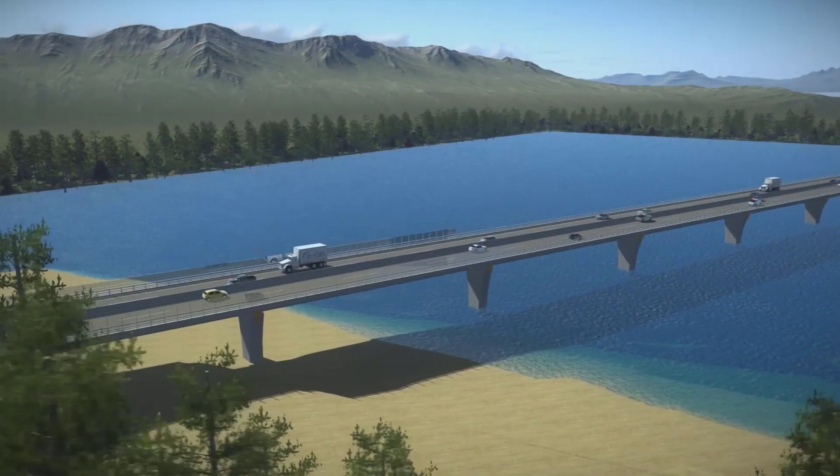The students were able to model their own 3D bridge using Bentley's Open Bridge software. The following design parameters were followed.

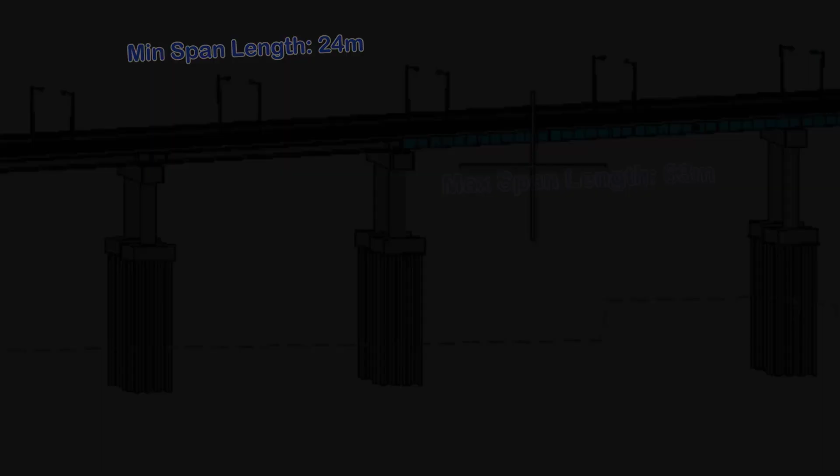Bridge length of 360.9 meters. Finished grade elevation of 176.922 meters. Minimum span length 24 meters, maximum span length 63 meters, minimum bridge width 23 meters. Two-way road, 2 walkways, 2 traffic barriers, 2 parapets, and 1 median barrier.

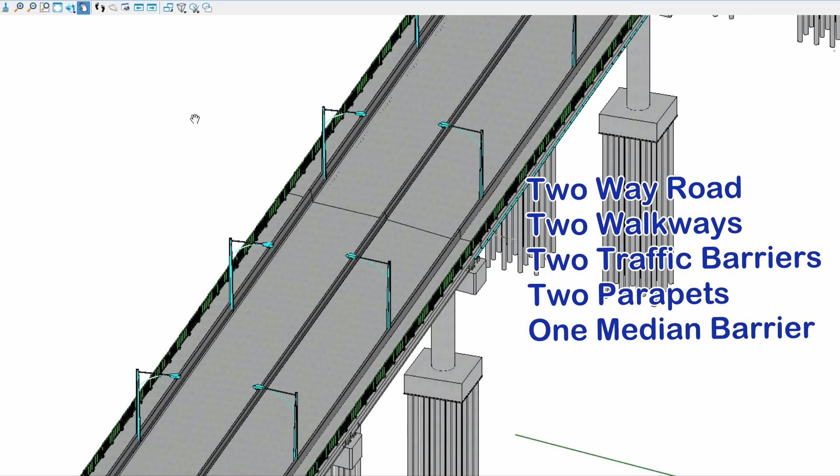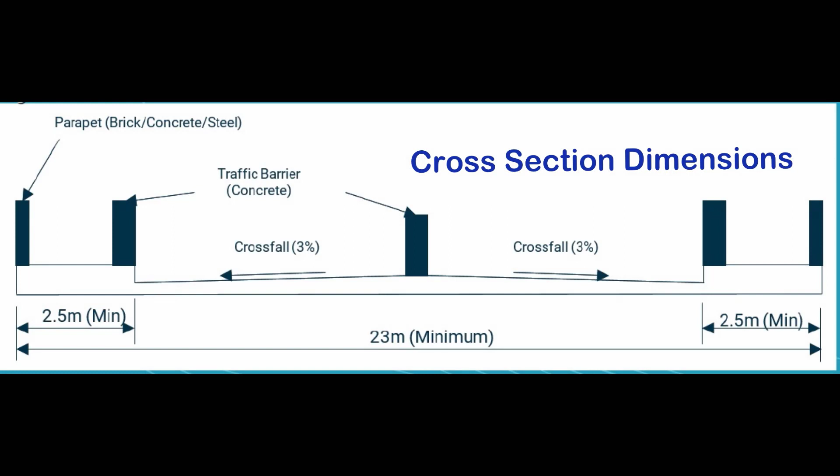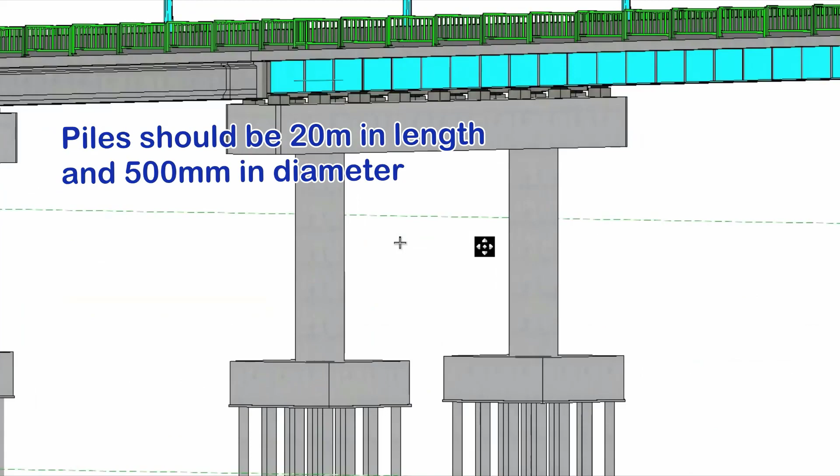Cross-section dimensions: adjacent spans will have steel girders, while all other spans will have concrete girders. Steel girders shall be built-up I-shaped members with cross braces and stiffener plates. Edge beams should have splice connections. Piers and abutments can be of any shape. Piles should be 20 meters in length and 500 millimeters in diameter. Wing walls for both abutments are required.

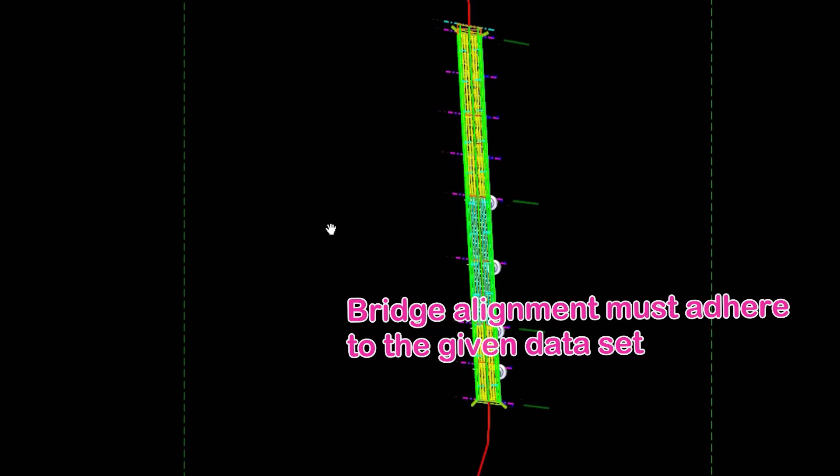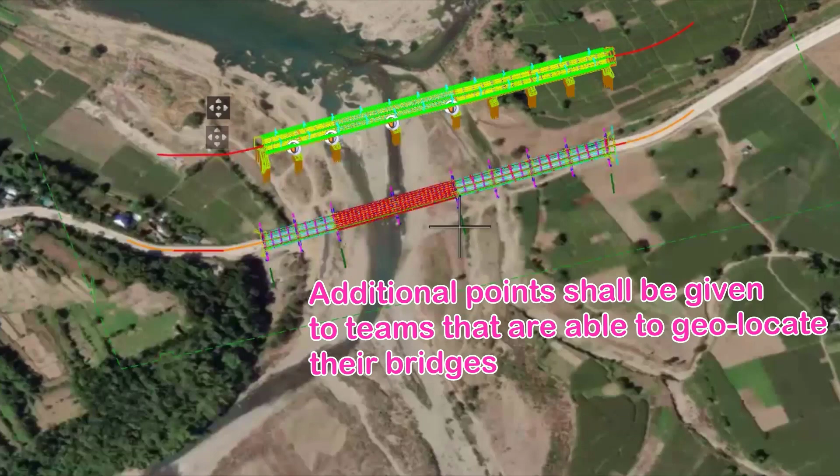Bridge alignment must adhere to the given dataset. Additional points shall be given to teams that are able to geolocate their bridges.

Here is the competition timeline for the 2022 Skills Olympics. The competition officially started last June 9 during PhilConstruct Clark. The design phase began on June 14, while the methodology phase will officially start on July 22 during PhilConstruct Cebu. The construction or build phase will commence on September 10 during PhilConstruct Davao. The grand finals and awarding of the winning team shall be announced during PhilConstruct Manila at the SMX Center.

Who will win the grand prize of 100,000 pesos? Let's meet our participating teams.

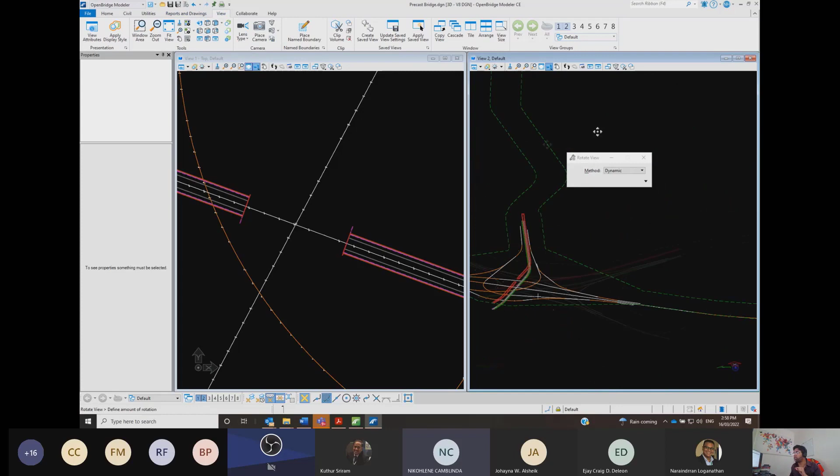To prepare the students for this phase, a series of software trainings were officially facilitated by Bentley. For the first session, Bentley focused on the introduction of OpenBridge, with our instructor, Engineer Nazir, detailing the scope and limitations of the software. He also tackled the most important aspect of modeling a bridge, which was the alignment. Engineer Nazir also tackled topics on how to import geometry files, which would prove vital for the positioning of the substructure elements of the bridge.

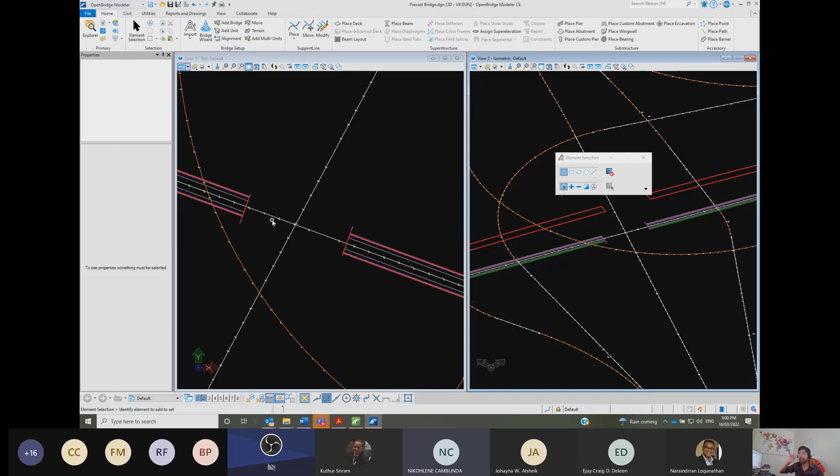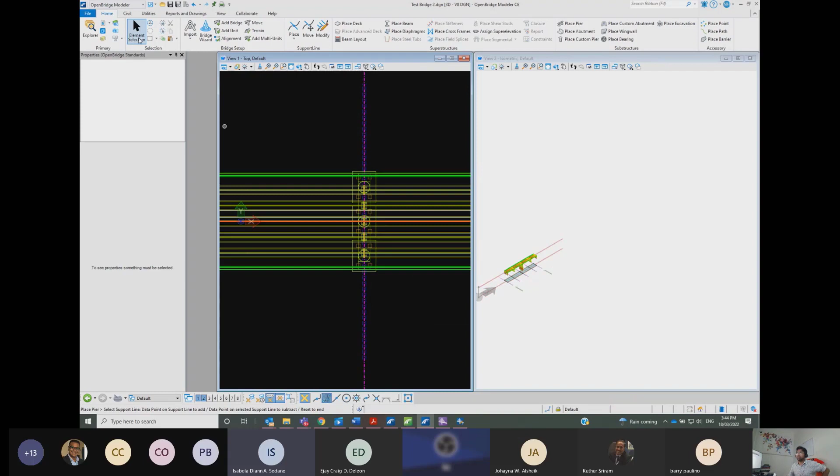For the second session, the creation of the super and substructure elements were discussed. The placement of the bridge deck, beam layouts, and girders were tackled during the first half of the session. For the latter half, the placement of the piers, pile caps, and abutments were touched upon. Within 2 sessions, Engineer Nazir was already able to teach the participants how to roughly model a basic bridge.

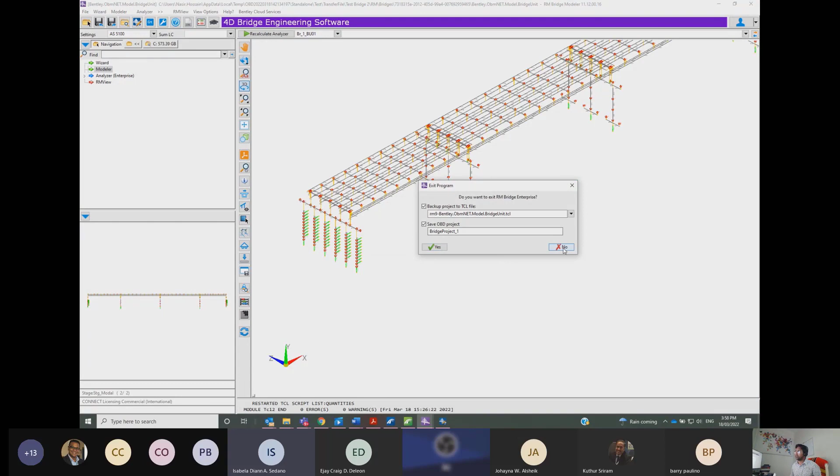Succeeding sessions served to further enhance the mastery of both the mentors and the students, with Nazir giving us some helpful tips and tricks. Specifically, he gave pointers on how to create custom deck and beam profiles. He also demonstrated how the participants can use OpenBridge's geolocation tools to help them identify the exact location of the bridge that they are building.

These sessions proved to be the most fruitful ones, as our participants were directly interacting with Nazir and all of their previous struggles and questions were clarified. This was indeed a eureka moment for the entire design phase.

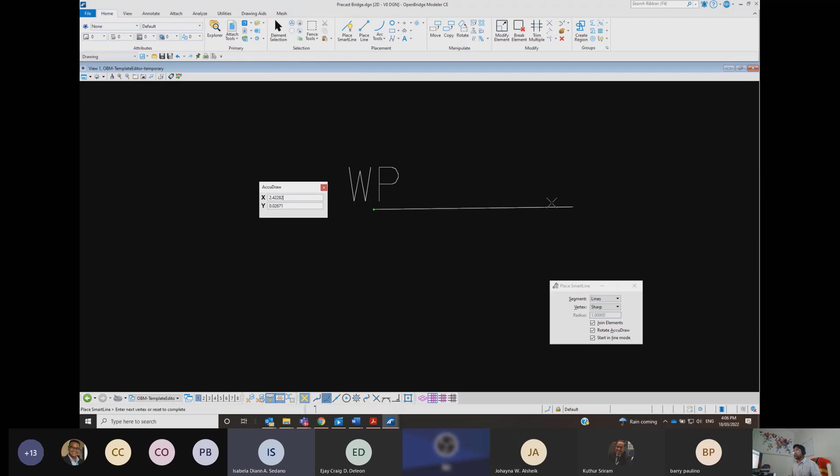We would like to share some audio snippets from our lead instructor, Engineer Nazir Hussain of Bentley Education Systems. Here, he discusses the type of environment that he wants the students to experience during the design phase.

We can think of it, it's a very good question. I would think of it this way: professionally, commercially, when the owner organization asks for some tender for design, we actually don't do the full design by that time, because you are just submitting the tender documentation. So sometimes it's very preliminary sketches, 1, 2, 3, 4 pages maximum. But from there you need to propagate certain things. Anyway, it's not a real life commercial thing here, but we are just trying to give a flavor of how commercial things happen in a real life scenario.

That's why we are very transparent on the points part, on how the points will be allocated. Like the alignment profile, you have 20 points. If the alignment and profile is perfectly done with the geographic coordinate system also, then you get the 10 points. If not, then you don't get it. If you can show those things, the deck, we have the variables. If you go into the deck, there are the variables. What are the minimum variables we wanted? If the variables are properly defined, then for the deck you get 15 points. So all those points based on the concrete spans, beams and other diaphragms, that's 5 points.

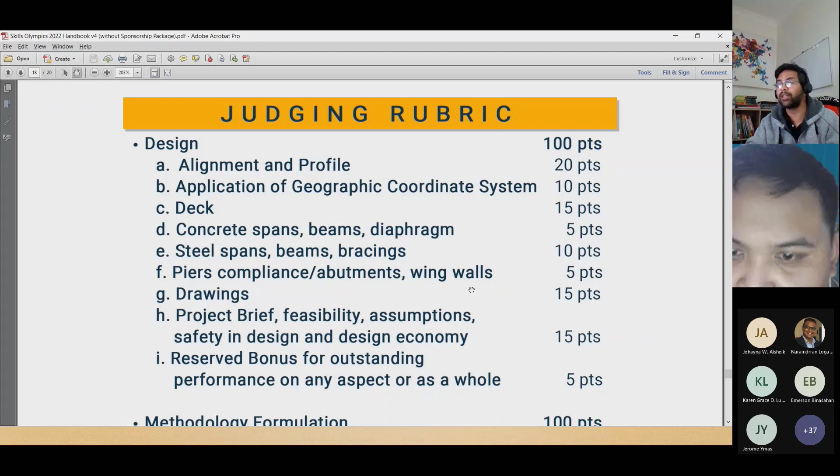Based on all these things you get 95 points, and 5 is reserved if there is some outstanding performance by someone on presentation or feasibility - something we don't know. We're reserving that so we can distribute it at that time. If there's nothing exceptionally outstanding, we'll keep that 5 away. That's out of 95. Just think from this perspective that you are doing something for tender submission, a commercial perspective. That exactly happens to owner or agent as well, because I work for owner organizations, and we used to do exactly the same way - we have a cut-off date and that's it.

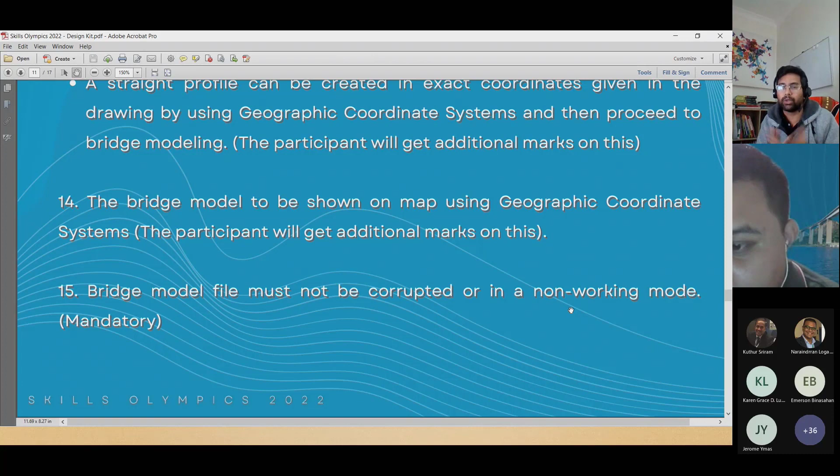So if you find there are questions, we are saying we are closed, right? It means you can't ask questions - you need to make your own assumptions and then go ahead with the model and bridge, because this isn't just about the software, it's your understanding, how you develop your studies. We want to see the whole holistic approach of how you do project management from a design perspective.

But sometimes we think from owner organizations, you need to be very fair to everyone. You need some criteria where you can judge people, and not only judge - we also want to give you a fun environment where you learn and get your portfolio, and it's a valuable portfolio. I can guarantee you, once you put your head through this, once it's done, you will feel you have learned something very significant. I can guarantee that to all our students.

Let's discuss the criteria and pointing system for the design phase. The total points to be awarded for the design phase is 100 points, with the following bridge elements garnering points based on their importance and impact to the finished project.

Alignment and profile, 20 points. Application of geographic coordinate system, 10 points. Bridge deck, 15 points. Concrete spans, beams, and diaphragm, 5 points. Steel spans, beams, and bracings, 10 points. Piers, abutments, and wing walls, 5 points. Drawings or drawing sets, 15 points. Project brief, feasibility, assumptions, safety in design, and design economy, 15 points. Reserved bonus for outstanding performance, 5 points.

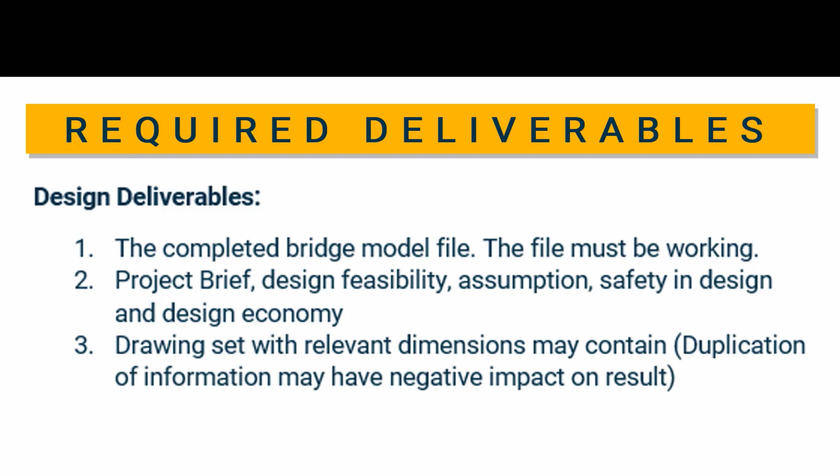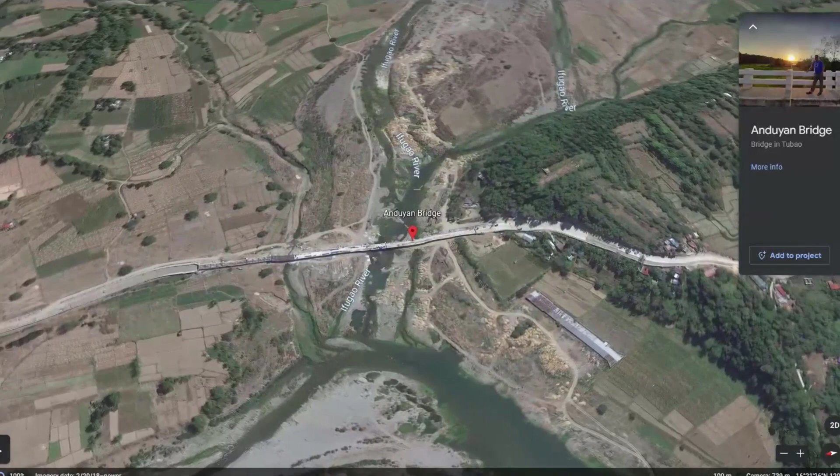With an enormous amount of help from the Department of Public Works and Highways, DPWH, we were able to obtain all the relevant bridge data that will be used for the competition. The actual structure is the Anduyan Bridge, based in Tubao, La Union.

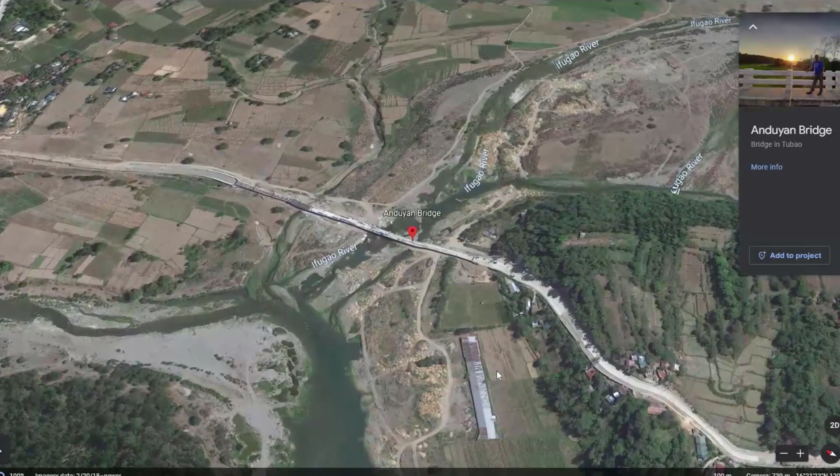Now, let us dive into the design process of our participants.

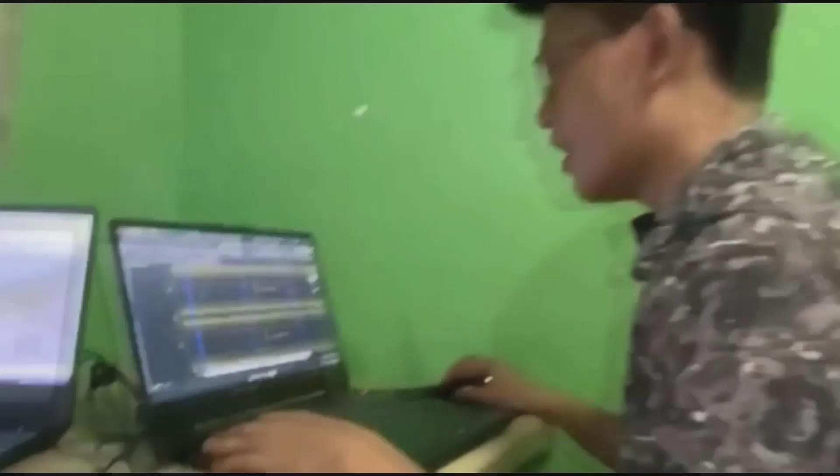Well, for starters, you need to identify the site constraints and key issues. Say, for example, for a river crossing bridge, ask yourself: where is the nearest fault system to the project site? Is there an issue in terms of soil liquefaction? Is there a history of excessive flood in the vicinity? How about the river morphology? Is foundation scouring expected? In short, you need to facilitate background data review based on the available information.

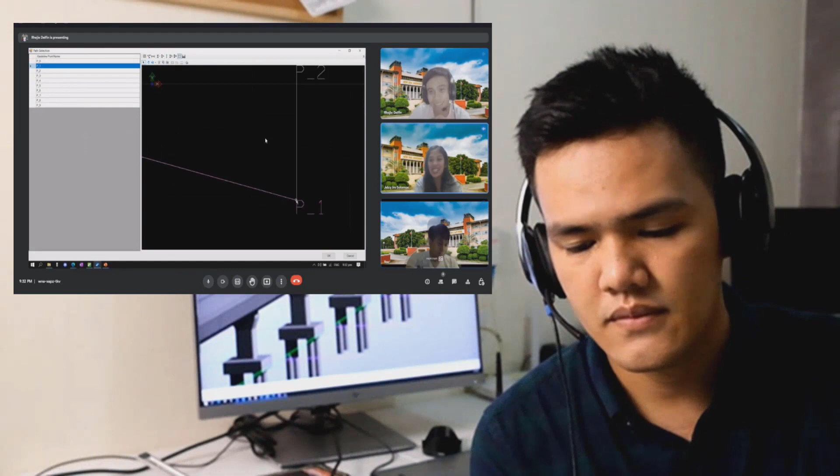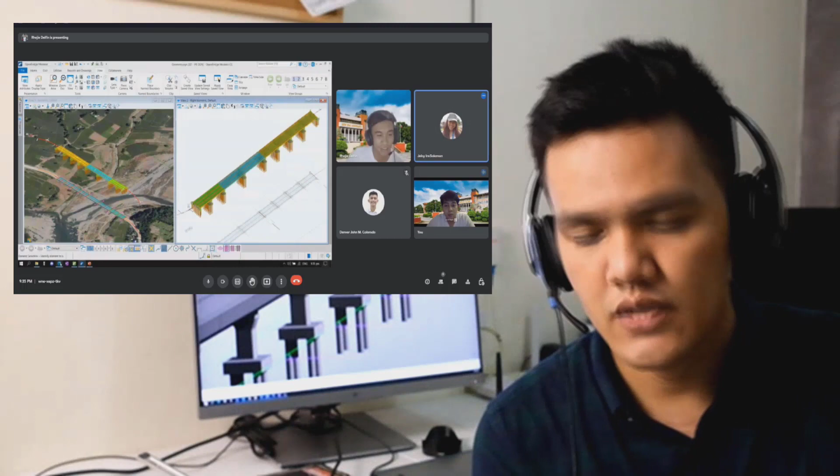The next step is you need to develop and compare various design options and provide relevant assessment methodology for the selection of each option. For example, in the case of span arrangement, where should I position my piers in order to achieve economy and efficiency during construction? Optioneering is also a vital part of the concept design.

Now, let's take a look at some of the bridge models that our participants submitted.

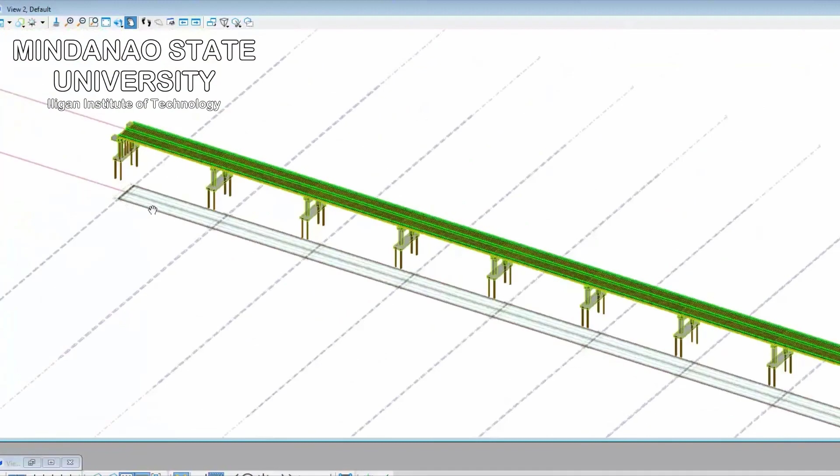Let's meet the design phase judges. Engineer Nazir Hossein, a senior application engineer from Bentley Systems. He has 15 years experience in structural engineering design and management in various disciplines, including bridge, road and rail infrastructure, onshore oil, gas and petrochemical, building, port and mining industries in the US, Asia, and Australia. His core experiences include but are not limited to bridge design and analysis, load rating, structural steel and reinforced concrete structural design and analysis, finite element analysis, and project management.

Dr. Ernesto De Castro is the President and Chief Executive Officer of ESCA International, which provides global engineering support services to international architectural, engineering, and construction companies. He is also a member of the Philippine Constructors Association. Throughout his career, he has been involved in and led various organizations and agencies such as the American Society of Civil Engineers, the Philippine Institute of Construction Arbitrators, Association of Consulting Civil Engineers of the Philippines, Association of Structural Engineers of the Philippines, and the Philippine Institute of Civil Engineers, as well as the Philippine Professional Regulation Commission's Board of Civil Engineering.

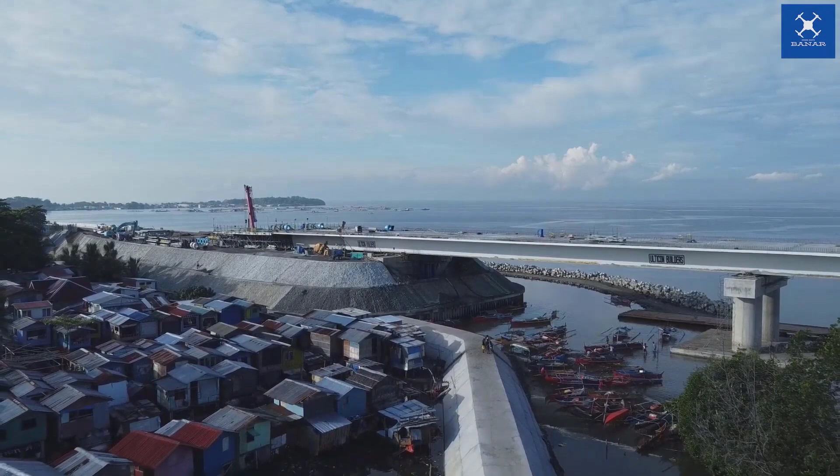Now, let's look at the next software that we will be using for the methodology phase, which will be Bentley's Synchro. Let's take a look.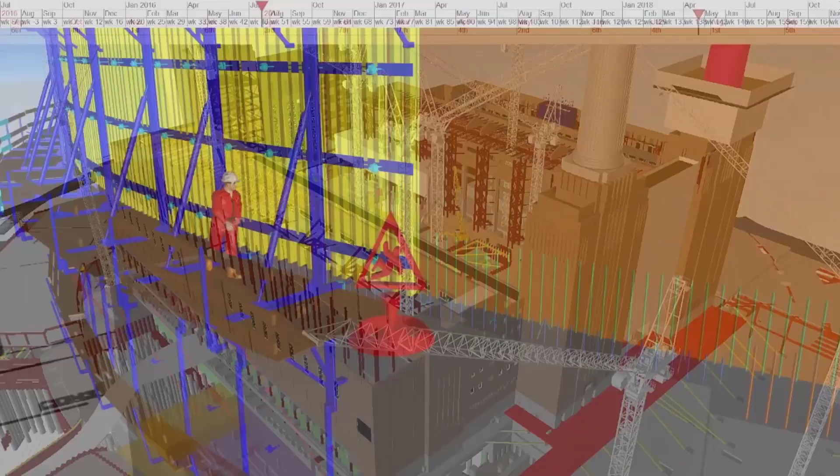The ability to plan, manage, and track projects in an integrated space-time visual environment provides benefits to all types of construction projects. Synchro's digital and interoperable platform enables improvements across all aspects of the delivery process, from safety, workspace utilization, productivity, quality and reliability, to project cost and competitiveness.

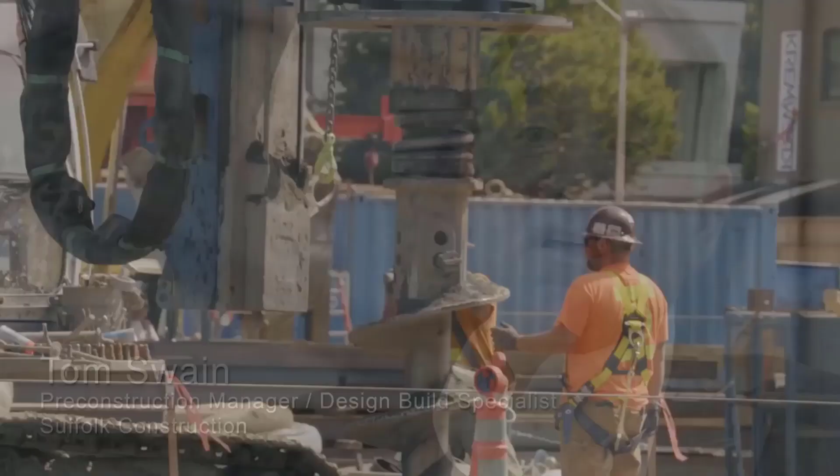Construction projects tend to be projects with a lot of moving parts: labor, material, scheduling constraints. If you don't plan all of those issues out ahead of time, then you're doomed for failure out in the field. Synchro gives the guys who are going to do the work a solid understanding of what the schedule means.

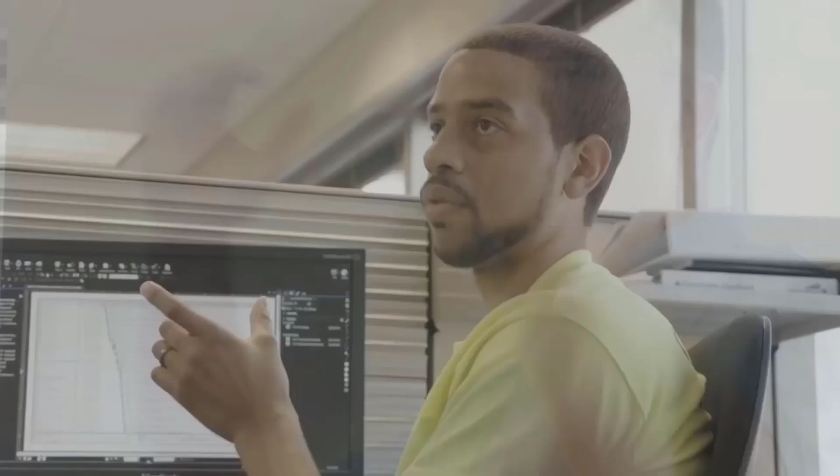We bring in the experts in the field, they tell us their challenges, we make changes, show them options, and then they confirm, yes, this is what we plan to do.

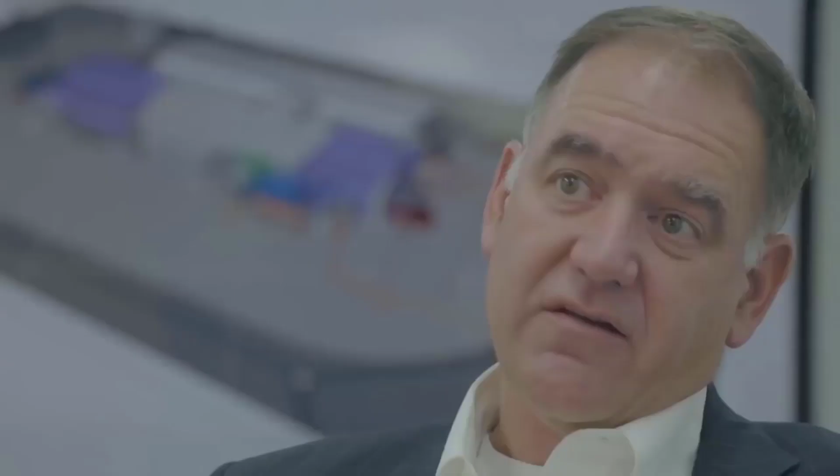We're able to catch things sooner that we wouldn't have caught, and we're also able to explain to the client who sometimes has trouble visualizing in 2D but can clearly see what's happening in 3D, why certain issues are safety concerns, why there are certain logistics, and why certain things can be done and can't be done.

Execution of 4D through Synchro will help the project keep pace with the changes and thus will avert extensive rework, will improve the schedule as the job is progressing, and will certainly lead to a higher quality and higher level of safety. We use Synchro as a planning tool to identify safety issues and then actually flag those issues inside the model.

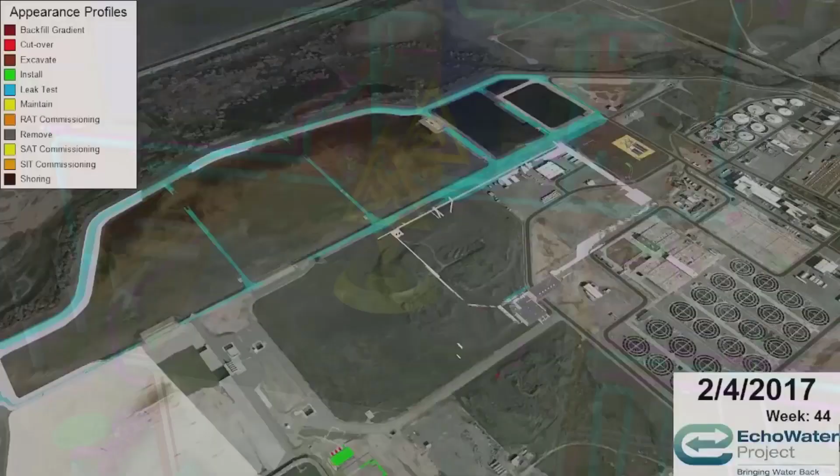Visualization and simulation provided so much better communication about safety and risk. The team went from 10 dropped objects to none, 3 recordable injuries to none, and 1 near miss to none.

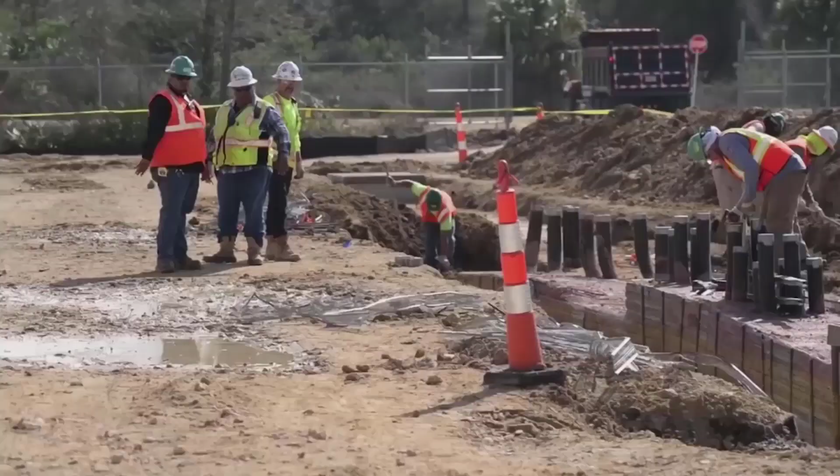Synchro BIM 4D allows us on a monthly basis to update our client in all 3 areas. Our delivery team, Suffolk, loves it.

Synchro allows us to run our projects better. It allows us to make our subcontractors smarter, and it's impressive for our clients. So our team embraces it and loves it and wants to do as much of it as possible.

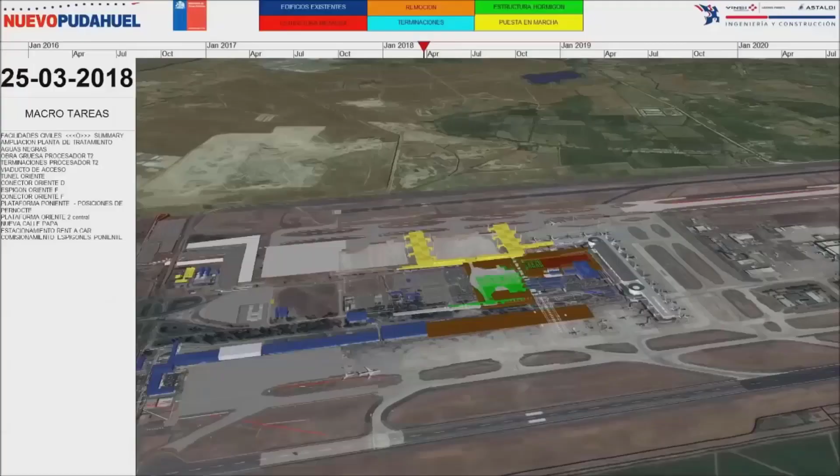The ability to see, to edit and to optimize every moment of time, minute by minute and day by day, in both space and time, builds the participation and understanding necessary for successful project performance.

From tendering through construction, commissioning and handover, Synchro Pro helps the entire supply chain perform better every day of every project. Imagine your project in a time machine, purpose-built for construction demands of the 21st century.

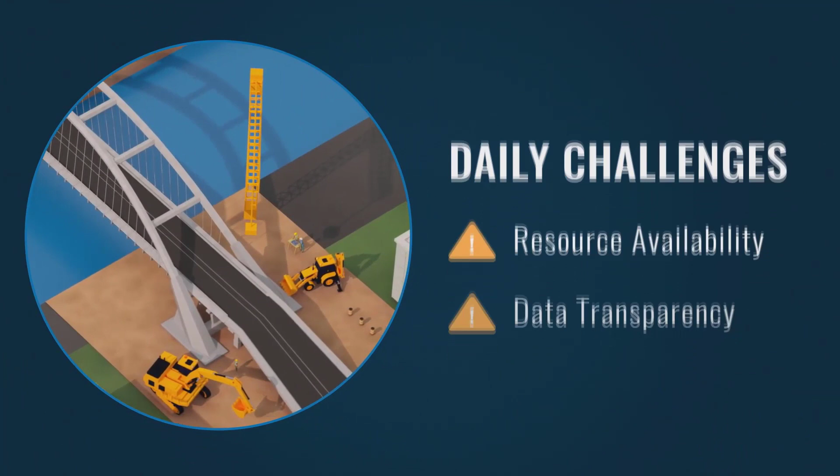Humans build. It's one of the most important things we do. As infrastructure projects grow in scale and importance, they also grow in difficulty, creating challenges around resource availability and data transparency. To meet these project demands, heavy civil construction teams need powerful digital construction management tools both in field and office to win projects, deliver them efficiently, and get paid.

No one understands this better than Synchro, the only construction management platform developed to meet the needs of heavy civil construction. Synchro delivers complete construction management, including virtual construction management, cost management, performance tracking, project management, and field management, keeping teams connected and on track at every project stage.

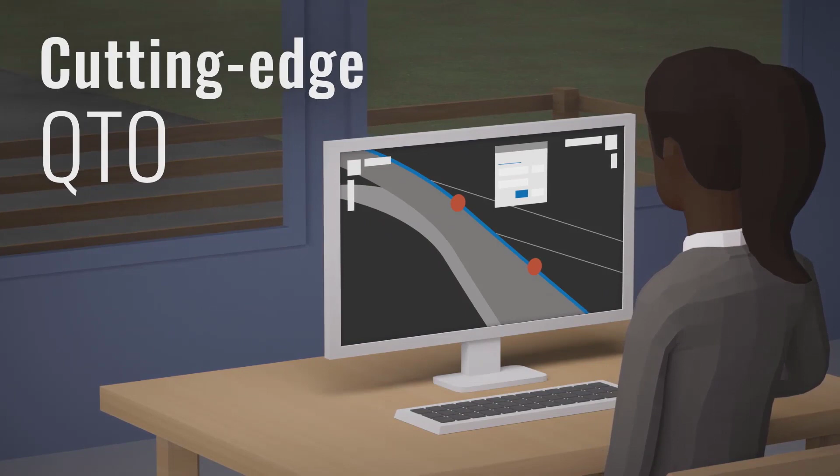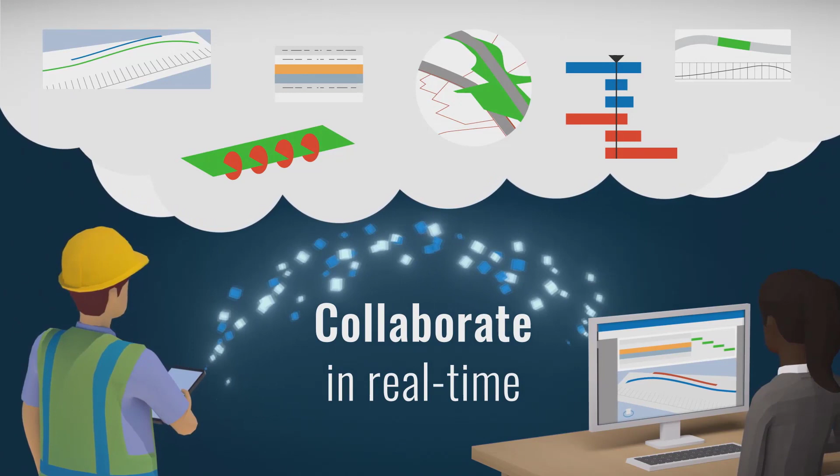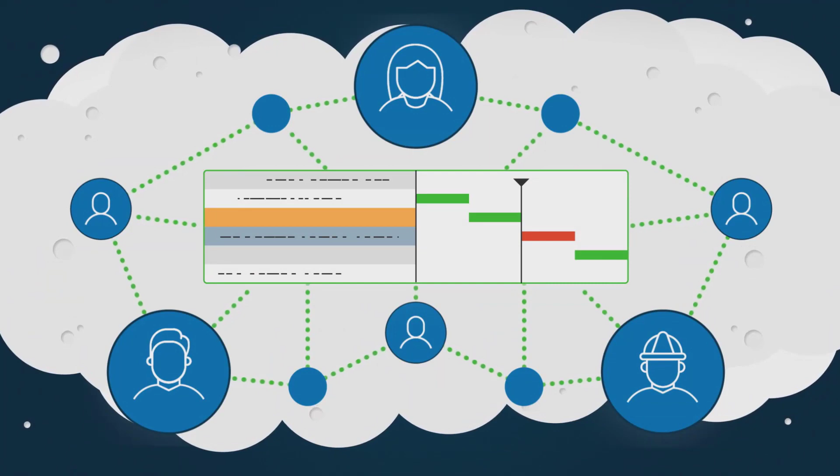Projects are set up for success with Synchro 4D, enabling teams to turn design models into construction models with cutting-edge model-based QTO, scheduling, and construction simulations. Project managers, VDC managers, and estimators can collaboratively draft, optimize, and track projects in a single visual, as well as identify issues early in a digital environment, ensuring all project teams and stakeholders stay fully connected on all project progress in real time. Synchro 4D users report that since utilizing Synchro 4D on all their 4D BIM projects, they have exceeded their clients' expectations in terms of speed of delivery and accuracy of simulations.

On the job site, teams use Synchro Field to access and share project information and to make quick decisions around productivity, quality, and safety. Synchro Field is a mobile app for phones and tablets allowing teams to complete project tasks on or offline while getting full access to project maps, PDFs, 2D CAD, and 3D 4D models. Superintendents, foremen, and inspectors can also capture project updates, handle inspections and RFIs, create custom forms, and flag issues. Synchro makes it easier for teams to plan projects, mitigate risk, and deal with project challenges before even stepping foot on site.

In the office, project and operations managers work in Synchro Control to manage documents, review data and tasks, and collaborate with field teams. Synchro Control is the control center for all project information and analysis, providing insight into the whole project picture and keeping everyone on the same page.

Teams use Synchro Perform to manage timesheets, monitor daily costs, measure progress, and optimize resources. This helps project managers and financial administrators drive projects using real-time field progress and cost data and make better decisions that minimize project errors and maximize team productivity.

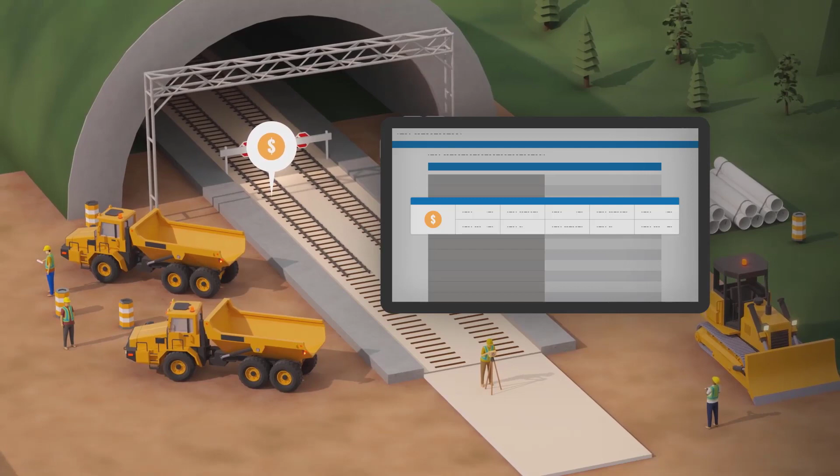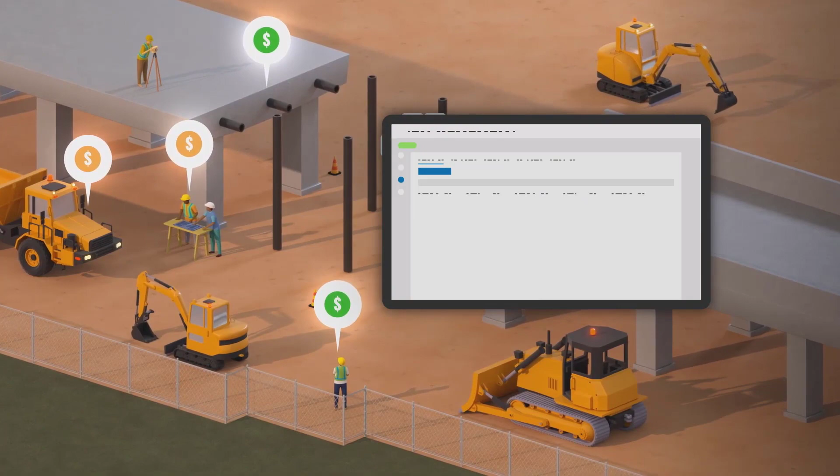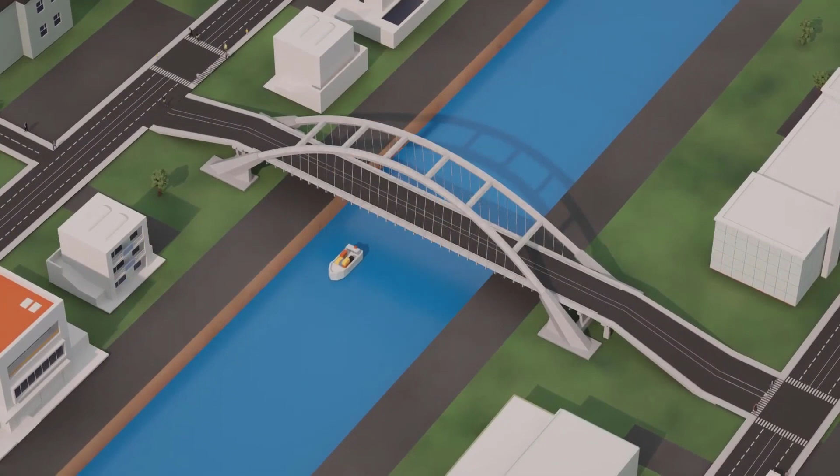When it comes to budgets, Synchro Cost takes on the necessary task of managing project expenses. Synchro Cost is a contract and payment solution that lets cost managers control and collaborate on budgets, monitor payment updates, and handle change orders. With Synchro, teams simplify how they construct, saving time, money, and resources throughout the entire project lifecycle. Synchro ensures construction teams know where they are going, and how to get there faster.